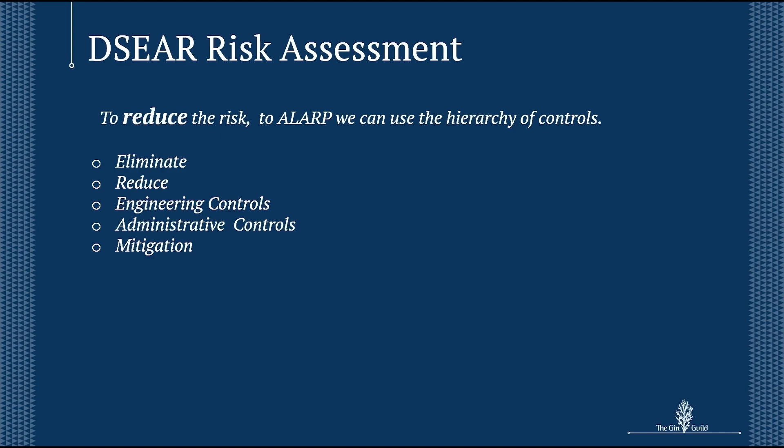However, the main ones that you're going to be using are engineering controls, administrative controls and mitigation. For engineering controls, you're going to use ventilation and pipework to limit the amount of releases around your site. You can also use electrical controls and mechanical controls to do that. You've got administrative controls, safe systems of work and procedures, to limit the interaction that your staff have with these flammable substances.

And mitigation: what do you use if something does happen? You can use pressure relief, explosion relief, bunding to contain large spills. The building construction, i.e. if your building is made out of concrete, it's a lot less reactive to fire than a wooden building.

So can you do a risk assessment yourself? If you can see the risks from the substance you're using, ideally, I recommend it for small micro distilleries. There's enough information out there, and there's the approved code of practice that the HSE have written for your guidance, which I think goes from L135 to L139, which is good information.

However, for mass-produced stills, a lot of the time, this can be part of the manufacturer's instructions. I don't always see it when I go onto sites, but some sites do get it. I think it's something you've got to ask for as and when you pay for it, and this is an example of that kind of information. This comes from a Muller still, a Compact 3.

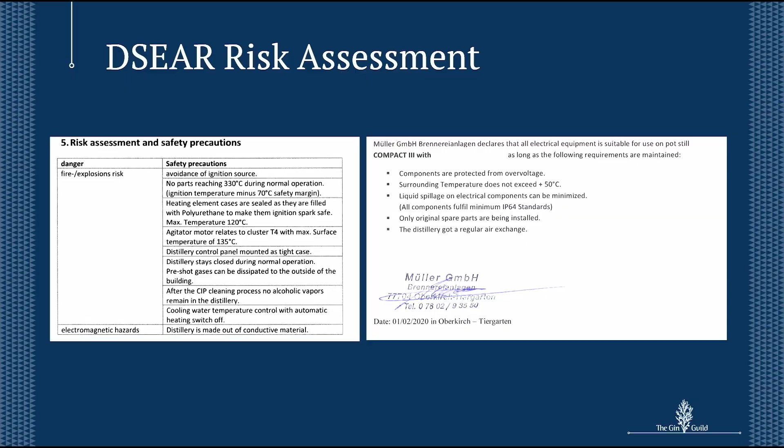If you just notice on the right-hand side at the bottom, the manufacturers are asking you for regular air changes in the distillery. And this is because some of the equipment they use on these stills is not always certified for hazardous areas. So you have to be aware of what they're asking you to do, because this is often missed when we go around sites.

So the next part of your policy is your hazardous area classification.

After you've reduced all the releases to a minimum using pipework and ventilation, the remaining areas should be classified into zones, and an area classification report, and ideally, should be combined with area classification drawings. Each release will be allocated a zone, a T-class, and a gas group. The gas group and the T-class will stay the same. The gas group for ethanol is 2A, the T rating is T2. However, the zone will alter.

When we look at zones, we look at a zone 0, an area where explosive gas atmosphere is present continuously. You're looking at the internals of storage vessels, you're looking at the internals of stills. Zone 1, an area in which an explosive gas atmosphere is likely to occur. I'm looking at open vents, the likes of spirit safes.

And then for a zone 2, an area in which explosive gas atmosphere is not likely to occur, you're looking more along the lines of flanges which shouldn't leak, but over a period of time could, pumps and pressure relief valves that are not supposed to be working in normal operation.

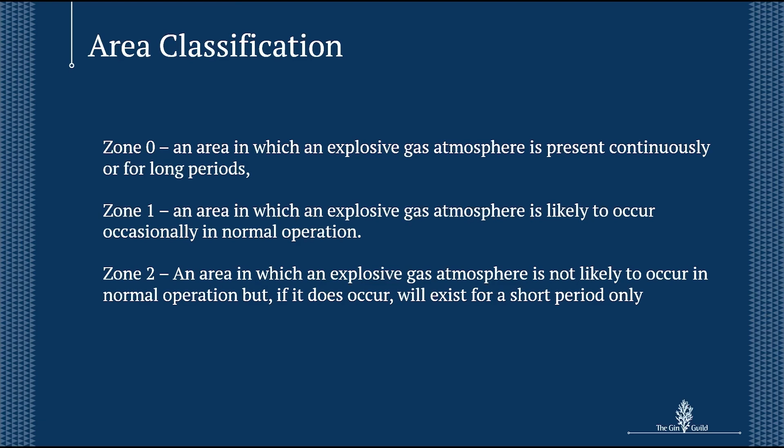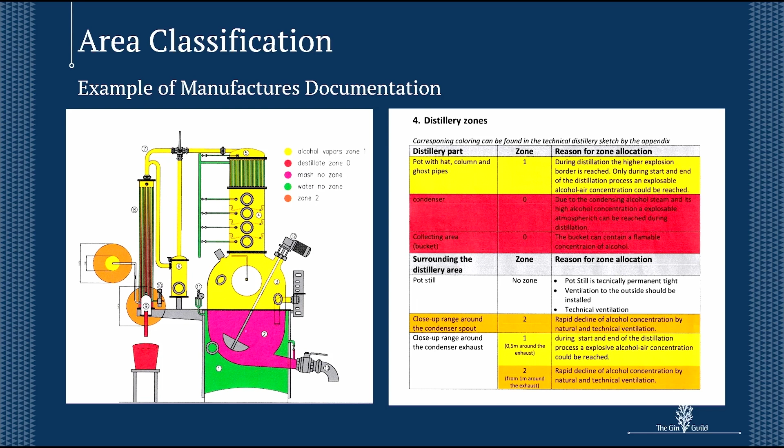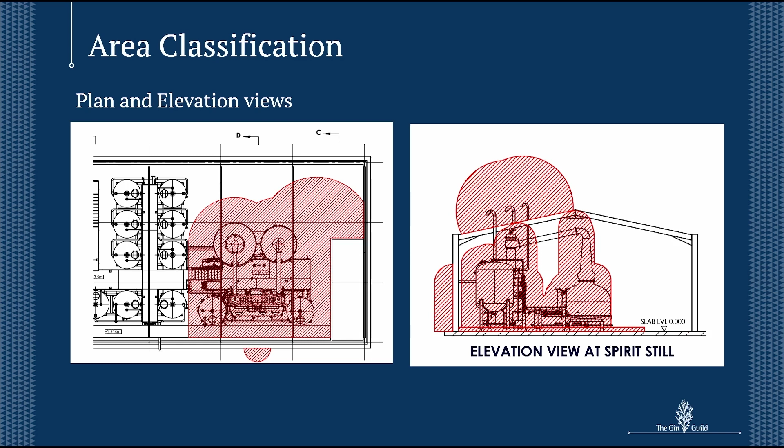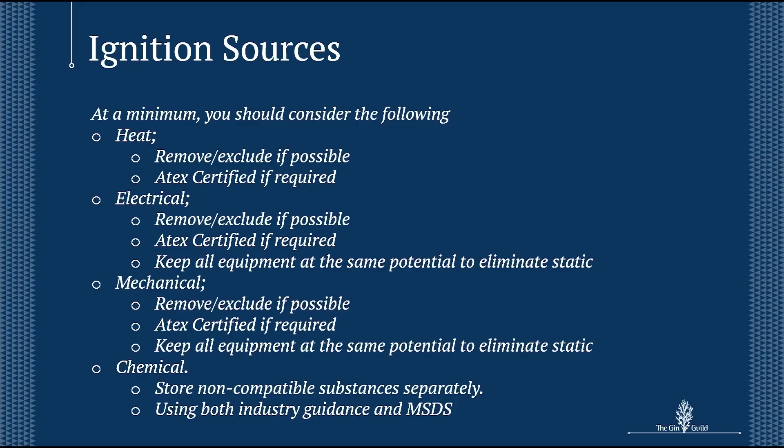So the next part of the policy, you need to be looking at your ignition sources inside these zones. At a minimum, you should be looking at these 4. Chemical, you shouldn't be storing incompatible chemicals together. However, you should have already covered this with your assessment. So the top 3, heating, electrical and mechanical. If you can remove and exclude, if possible, from these zones, great.

If you can't, and you do need them for the processing, you start having a look down the area of the ATEX certified equivalent. And then just under electrical and mechanical, you need to look at the potential of static. So you need to make sure everything's at the same potential. You might be transferring ethanol, and it could be through a plastic pipe. You need to make sure that both bits of kit are at the same potential.

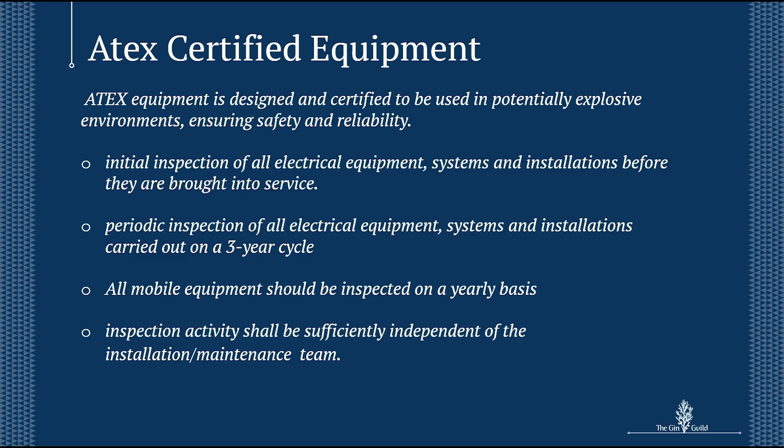So ATEX certified equipment. ATEX equipment is designed and certified to be used in potentially explosive atmospheres. Ideally, you need to be having an initial inspection on these pieces of electrical equipment before they're brought into service, to prove that the protection concept is safe. And then periodically, every 3 years, you need to be getting these re-inspected to maintain that the protection concept is still safe.

Mobile equipment, you should really be inspecting it yearly and every time you use it. And ideally, and this is the most important one I think, the inspection activity should be sufficiently independent of the installation and maintenance team. And the reason for this is on the next slide.

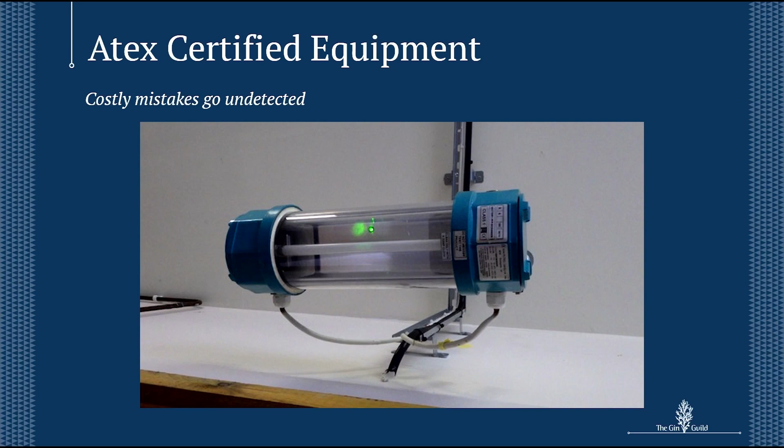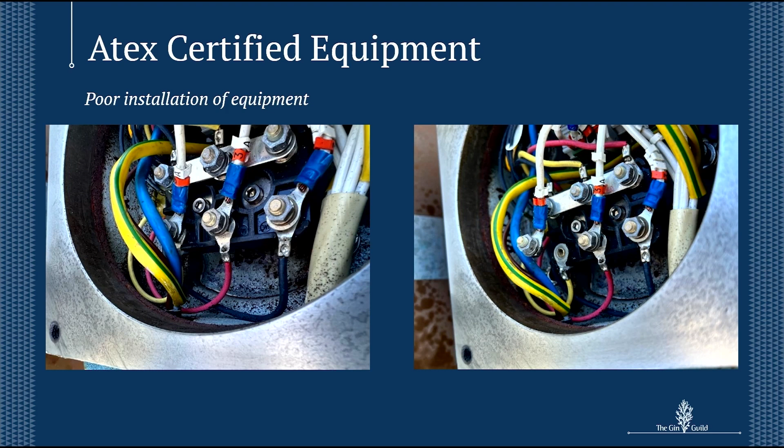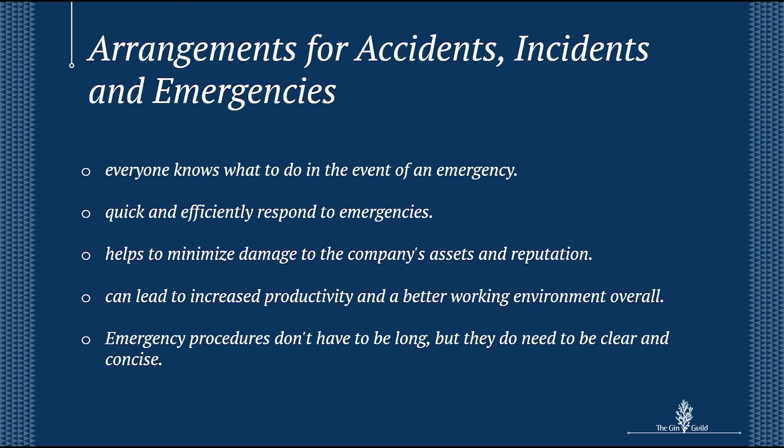So in the last two, we're just going to look at arrangements for accidents, incidents, and emergencies, and information and training. So you need to know what to do in an emergency, and the faster you can efficiently act, the more chance you have of protecting people and your distillery. And the other thing is, really, you need to know where people are. You don't want to be sending the fire brigade into a burning building looking for someone who has gone out another exit and didn't know where to go.

You also need to provide some kind of information for these people because they're going into a building and they don't know what's in it. They could ideally need to know the amount of flammable substance in that room, or if there is any flammable substance in that room.

And finally, if we just look at training and how it helps improve the knowledge and skills of your employees. It helps them identify potential hazards. It helps to prevent accidents and injuries, and it promotes the right culture, and that's the main thing. It promotes the right culture. It's very hard to change a company's culture when they've been doing something for so long.

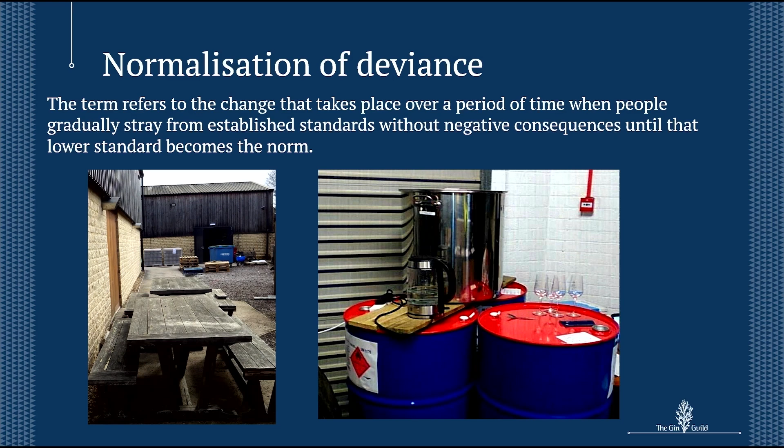So this is normalisation of deviance, and there's two pictures here on two separate sites that we went to, and on the right-hand side, there's a kettle boiling on top of a drum of ethanol. Now, everybody sort of knows that's wrong, and the guy who owned this site knew that was wrong, but over time, he just got comfortable with what he was working with. Nothing had happened when he did it. And then when I asked another member of staff why they do that, he said, well, because the boss does.

And this is what I mean, you're breeding a culture where eventually something will happen there. This one on the left-hand side is a little bit different because on handover, they didn't get the area classification. And this is what I mean by having a policy in place, you can ask for these things. They didn't have an area classification in place, and the vent just above the door there is an external vent for the ethanol tank.

And also, they didn't provide a smoking area for the staff, and they also didn't tell them that they couldn't smoke on site. So smokers do what smokers do, and they find a place to smoke, and they were smoking at the tables. Again, nothing was happening, but eventually something could happen. And now we're just going to look at two incidents where maybe a policy, or lacking in policy, could have helped.

So this was Buncefield. A low-lying cloud of heavy flammable vapour accumulated and spread over 250 metres in all directions. And the tank released 250,000 litres of fuel. So this was picked up by truck drivers on site. It wasn't picked up by any safety systems or anything.

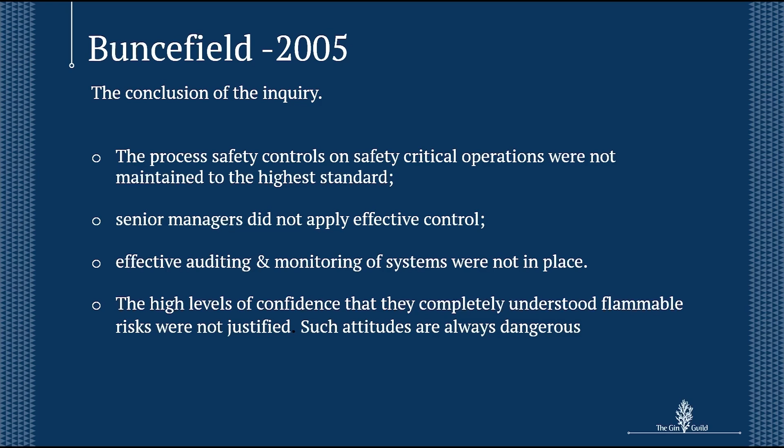So again, senior managers did not apply effective control, so you could look at it and say that the companies did not set the standards for their management team. Effective auditing and monitoring systems were not in place, like we just talked about. There were no inspections done initially or periodically to make sure that this equipment was safe to use.

And the high level of confidence, which you find a lot and which we looked at in the previous 2 slides, that they completely understood the flammable risks was not justified. Such attitudes are always dangerous. They'd normalised a lot of deviations on this site, and it ended up costing them. It was the biggest disaster since the war, and I think the cost ran up to in the region of 800 and something million.

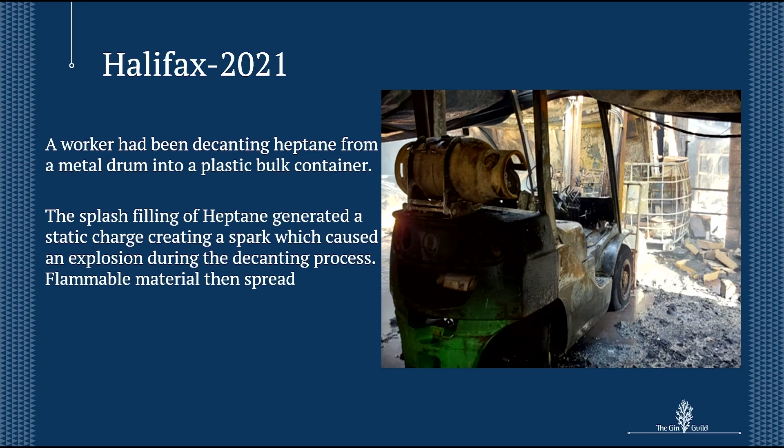So now, I just thought I'd put in a recent one, just to show you that it still happens. This was one in Halifax, and a worker had been decanting heptane from a metal drum into a plastic bulk container. The splash filling of heptane generated a static charge and created a spark, which caused an explosion during the decanting process. Flammable material then spread. The flash point of heptane is -4, so it's always giving off vapor, and the auto-ignition temperature is 220.

So when we look at the conclusions of this, it was an unsafe process of decanting, despite well-known industry guidance. So again, there was no setting of standards for the behaviour, the conduct, and the performance of these people on site. The uncontrolled spread of fire due to lacking containment. IBCs are used a lot in your industry. They're great for storing ethanol, but in a fire, they're useless. Within 5 or 10 minutes, whatever's in that IBC will empty all over wherever it is, basically. So you need to start looking at other ways to contain that if that does happen.

And a poor practice of storing cardboard nearby allowed the fire to spread significantly. Again, this is just general housekeeping. You shouldn't really be storing flammables close to where you've got dangerous substances, and a lack of training and supervision, which we've already talked about.

But one last point on this site, the director was fined and taken to court. However, he knew nothing about what was going on site, because he'd not set the standard of if a flammable comes on site, you need to risk assess it. So what had happened is the people on site had come up with their own process, and it wasn't exactly the safest process. And that's that. So I'll open the room to any questions.